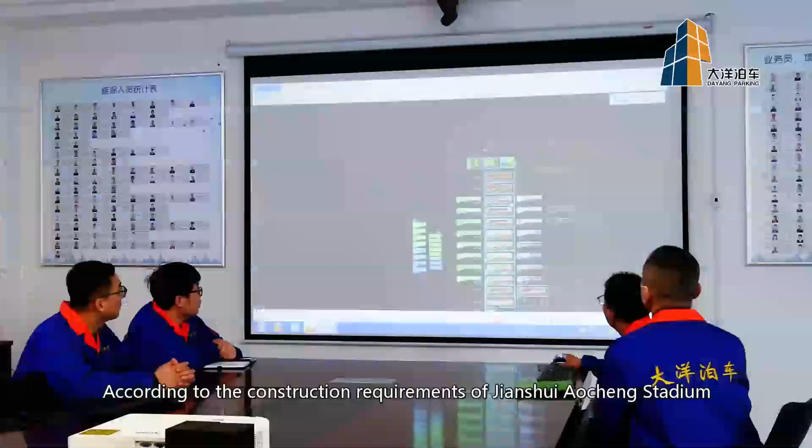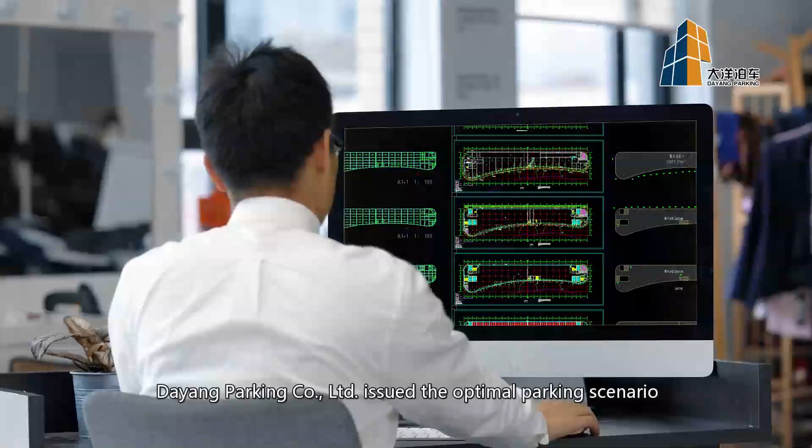Project Planning Overview: according to the construction requirements of Jianshui Aocheng Stadium, combined with the surrounding geographic elements, after many times of planning discussions, Dayang Parking Co. Limited issued the optimal parking scenario. The project adopts the design of an 8-story plane moving intelligent solid parking system above the ground.

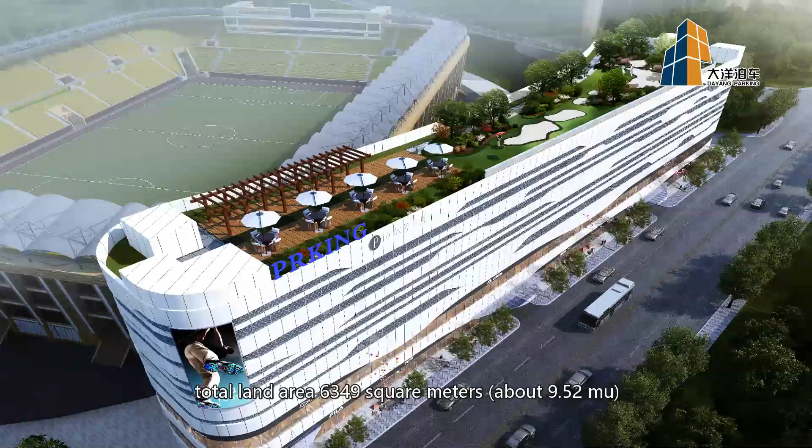Steel concrete structure. Total land area is 6,349 square meters. The total construction area is 21,392 square meters. The first to third floors are commercial facilities. The fourth to eighth floors are multi-story parking areas, divided into 2 large areas, A and B, by left and right, with fire separation in the middle.

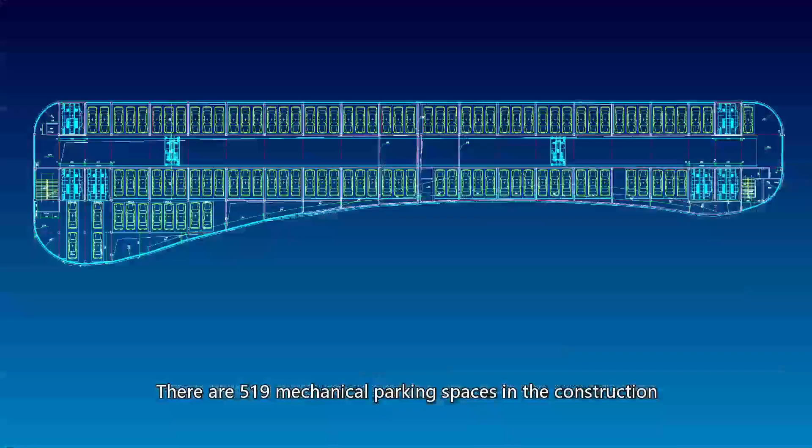There are 519 mechanical parking spaces in the construction. There are 6 elevators in the whole project, 10 sets of smart carriers, 4 entrances, 2 exits. 6 elevator positions are reserved to allow feature updates at any time according to subsequent usage.

Advanced garage design achieves smooth traffic according to geographical conditions. According to the height difference of the side terrain, 4 entrances are set on the first floor on the east side. Sufficient waiting area is reserved in front of the entrance to prevent congestion due to waiting for parking.

Cars enter the parking lot from the south entrance, choosing a suitable entrance to park into the garage. Oversized or passing cars leave from the north exit of the garage. 2 exits are set on the second floor on the west side. After being retrieved from the west exit of the garage, cars go out directly to Cuiping Road. Smooth traffic flow lines effectively prevent traffic congestion around the garage.

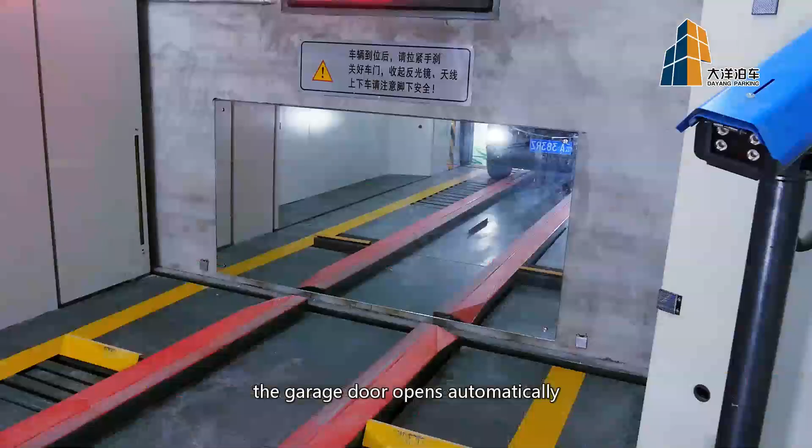Simple access, comfortable experience. During car parking, the driver drives the car to the entrance. The loop detector in front of the garage door automatically senses the car, and the garage door opens automatically. The driver only needs to drive the car into the garage entrance according to the voice prompt, pull the handbrake when getting out of the car, fold up the rear view mirrors, and press the safe button.

During car retrieving, the driver just needs to scan the QR code by cell phone and input the license plate number. Then the car is automatically taken out to the exit for the convenience of driving the car out. Using the mobile app or the WeChat public account online platform, online query of the current number of parking spaces, QR code scanning access, and real-time payment can be realized.

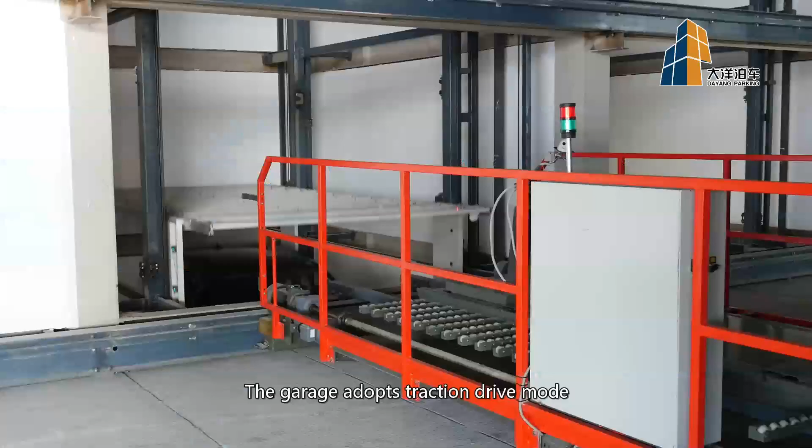Advanced drive and stable carrying: the garage adopts traction drive mode with steel wire rope lifting. The rated lifting load is only 55% of the car weight. Frequency speed control is more stable and reliable, and the acceleration and deceleration time of lifting is shorter. The slider adopts electric brush for power transmission, with no drag cable restraints, smooth operation, and no abnormal noise. Mature and advanced carrying technology providing a comfortable journey for your car.

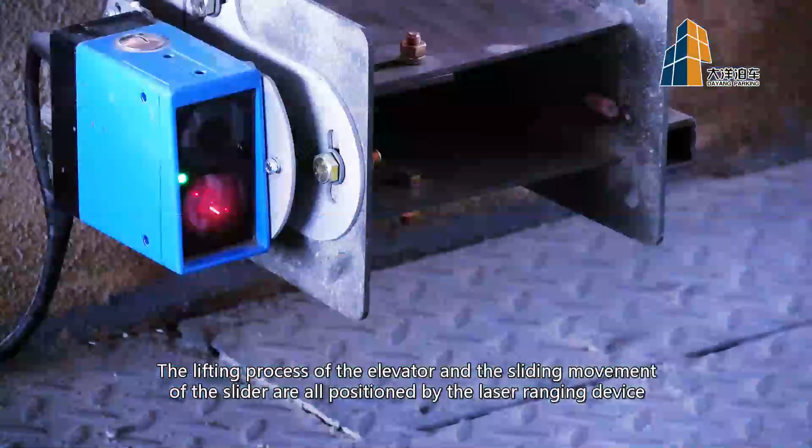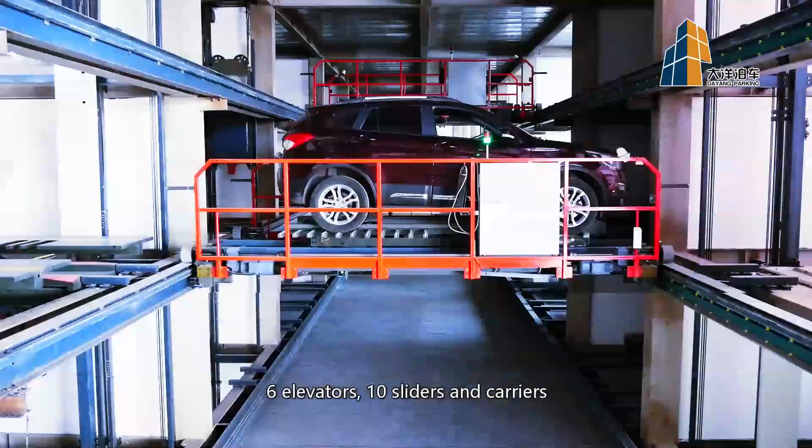Precise positioning and efficient operation. The lifting process of the elevator and the sliding movement of the slider are positioned by a laser ranging device, with positioning tolerance less than 2 mm. Comb exchange without returning the loading pallet. 6 elevators and 10 sliders and carriers can be operated independently and collaboratively to achieve parking and retrieving. Reasonable distribution through PLC centralized control operates the slider and elevator on each floor separately, improving the efficiency of entry and exit, and saving every minute and every second.

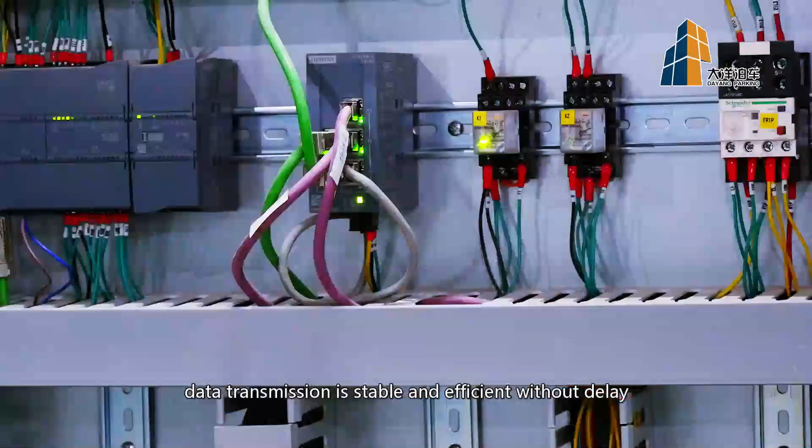Full monitoring, smart parking. The entrance is equipped with length, width, height, and life detection devices. Since the car enters the garage, the whole operation process monitoring is realized. The monitoring data is connected to the big data platform of Dayang Intelligent Parking. Industrial Ethernet is adopted for data communication, so data transmission is stable and efficient without delay.

Support for non-local system and process data queries. At the same time, it integrates the company's city-level data management platform, realizing the functions of parking lot data collection, data analysis, and data sorting. It can also collaborate with the technical staff of the head office in real time to realize remote fault diagnosis and garage remote monitoring, with quick troubleshooting.

When building the urban smart parking management platform, more and more smart parking garages are providing strong data support for urban management, social governance, and government decision-making. Create the new urban parking space with technology, create high-quality Dayang products with responsibility. Dayang Parking is willing to join hands with you to create a better future.